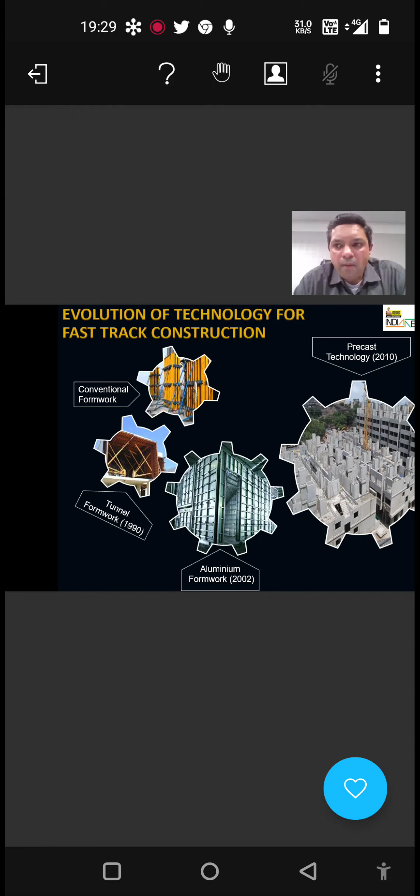With that poll now, next what we are... precast, right? We started precast, and again I keep repeating that I am not in precast business. L&T is not in precast business. This precast has evolved over our need.

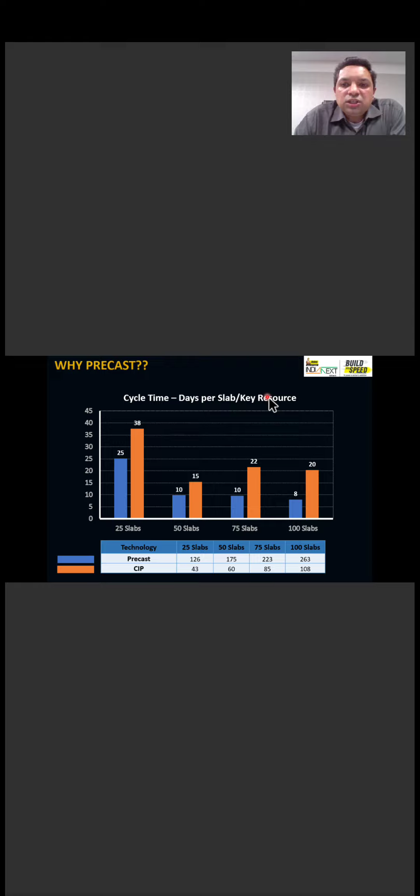So in aluminum system, it's the aluminum formwork set. In precast system, it's the crane. That's my key resource, key bottleneck at the site. So how many cranes I have put, and per crane, what am I getting out of that? If you look at that in terms of resources put and then the cycle time, days per slab, you will quickly start seeing that even if this is quicker, this was done with many more sets. There were almost 20 plus sets put in.

So per set, I still took 25 days to build one floor in precast, and in cast in place, it took 38 days to build one floor. So it's obvious that the precast is doing better in terms of your resources. If I need even more speed, because this is designed to what is planned, what the client wants, I can just put another crane and get more speed out of it. Putting another formwork set has its own issues, right?

The second thing is, if you look at how we improve things, right? The two projects were not going at the same time.

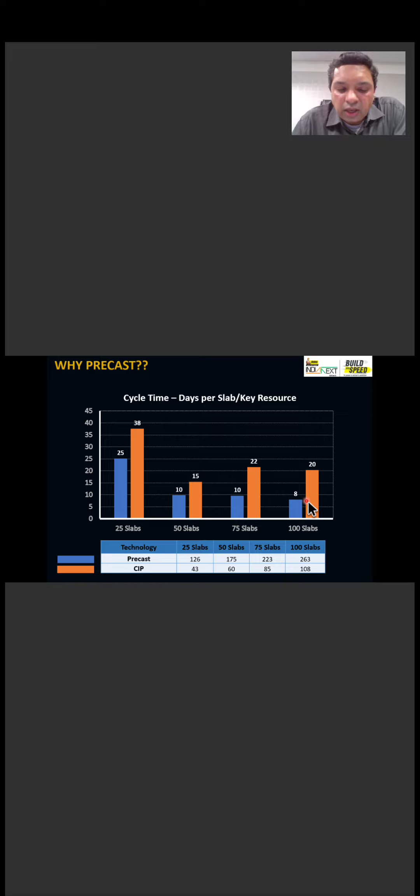There is some delay because of COVID, but it takes a little more time while your project warms up, and then you improve your speed. So this increased again for the COVID second wave, and then it kind of maintained. If you see precast, this has quickly built up, and once it built up, it has sustained that cycle time, right? That's what I wanted to drive through this.

The other thing, if I do the same project again, whatever we estimate usually, if you look at aluminum formwork, we want fewer people at site, right? We want fewer resources so that my risk is lower. One of the biggest risks in construction today, especially residential, is having your workforce at site. When COVID waves hit, the biggest thing was getting people back, right? Everybody, even media, was talking about it. So if I have fewer people to do the same work, my risks are less, right?

The challenges are less. If you look at that entire activity in aluminum formwork, per cubic meter of concrete, I need about 5.5 man days. So let's assume I need 5 people there. For the same thing in precast, which is conventional precast and automatic precast, this is what we are doing now. We can even go to fully automatic, what the global industry usually does, and it will improve even further. But I have kept it for where India is right now, what we are doing at best. I am looking at 2.5 man days, so it's about half.

But that's not the real story. Out of these 2.5 man days, I need about 1 for production and only 1.5 at site. So if you compare site activities in precast and conventional construction, I have about 70% reduction of site activities or site requirement of people. And this is where I'm covering my risk. I don't have to worry as much about having the workforce at site.

Workforce at factory is a very different ball game, right? We have a much higher retention ratio at factory because they're working in a much more controlled environment, at ground level, in a covered shed. I don't have that worry of not having people, right? Whoever is there, they always stay.

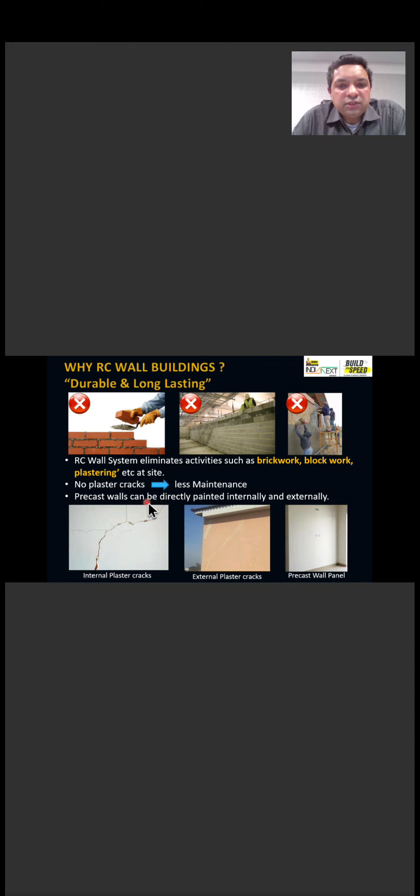That call was taken in the 2002 timeframe, right, when aluminum formwork became popular, for this very reason, especially in high-rise construction. I don't want to go outside, put that scaffolding and finish the building. I will pour concrete, even if it costs slightly more. The net tangible benefits are much higher compared to the upfront cost. And this is one example.

This is our building. This is a precast building, but the lower floor was done in cast in place because it's a non-typical floor. And this was done in brick wall and plaster, and then the building above is in precast RC concrete. This picture was taken about 6 months ago, after the building has been standing for 7 years.

Pragati Towers in Mumbai, a ground plus 23-story tall building, about 70 meters tall. Everything after the first floor, what you see in the picture, is done in precast system, factory made, including your spandrels, the walls, the lift shafts, the precast stairs, the whole 9 yards. This was one of our flagship projects.

That picture you saw had 3 buildings; we later added 3 more. So about 2,000 flats were built in about a 3-year time frame. It of course won several awards.

Yeah, thank you. Several awards, and the building has been...

The second project, which is what I'm going to discuss a little more in terms of the case studies, is our Provident Sunworth project in Bangalore that we started in 2014. Again, mass housing. This was for a private builder. It's not a government project. About 66 towers, 5,000 plus units, all G plus 12 or G plus 14 towers. Total precast system. What you see in the picture is all precast.

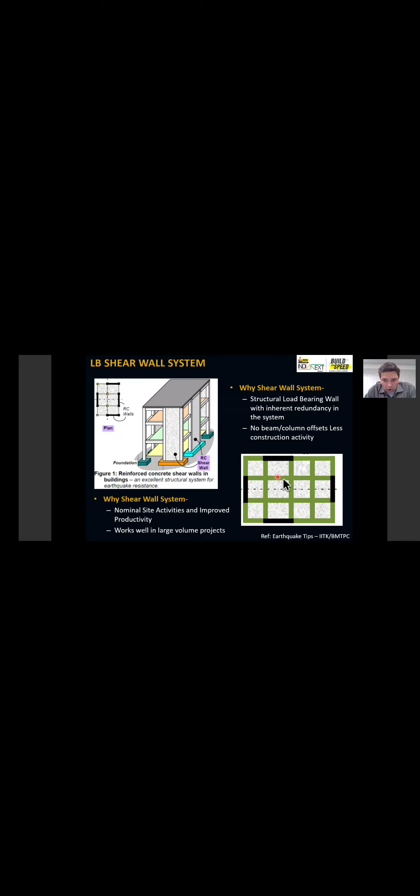What we are doing is we are trying to see if we can do all walls. Some of those walls are still my shear walls, the balance are my gravity walls. It is equivalent to your beam column system, right? Not all walls are shear walls in the system. Now, once we pass this, what are we doing in precast? The precast philosophy is the next step of your aluminum formwork system, nothing else. Exact same system, same building. Only thing is I split the panels and make it in the factory.

How do we connect it? We are using this emulative approach, right? We can't get into too many details, but just focus on the word emulative. What that means is if you use this emulative detailing, your precast building is going to behave equivalent to your conventional building, that is aluminum formwork. This is from the American Concrete Institute. They have specific standards for emulative detailing. They will tell you exactly what to do. If you do that kind of detailing, the wet construction connections, you get equivalent performance.

There is a Precast/Prestressed Concrete Institute, again in the US. They take it even a further step. They said that if you do this emulative detailing, regardless of seismic region, you will get performance equivalent to that cast in place system. And this is what we are doing. What is not emulative? Welded connections, bolted connections. We are probably a couple of years away in India from adopting those. There are various reasons.

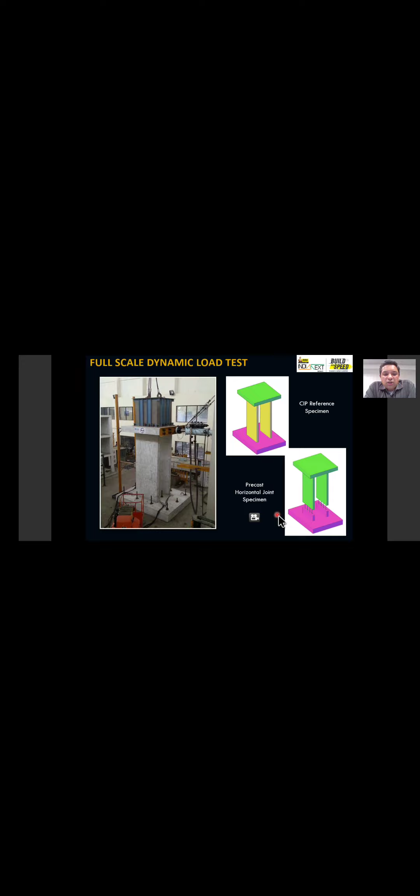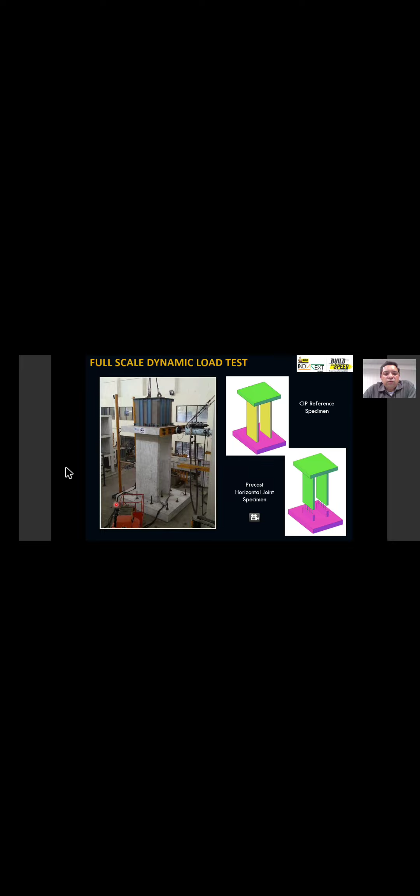But if you want to see that emulative performance, we were also getting that question a lot. So what we did is we ran a full-scale test program in the 2016 timeframe, saying this is how I'm going to do emulative detailing, and I'm going to validate if it gives me equivalent performance. Right? That word equivalent is important. I don't want better performance. I don't want superior performance, because all our design codes are currently built around the RCC system. So I just want to make sure that I build one specimen in the conventional system.

These are my two shear walls, foundation if you want to imagine, and a slab on top of it. This is a full 3-meter high wall, right? And we are validating the seismic performance. This was done in the SERC Chennai lab. This was one of the very few labs at that time which had this seismic actuator, which pushes the building and pulls it in a controlled manner, so we can study it in detail and see how the system is performing. So this cast in place specimen was prepared, and then the precast specimen was prepared using the joints, right?

Again, the idea is, like I said, we want to see if they're performing similar. We don't really care at what level. So these precast joints were emulated. And then you look at your force versus displacement curves, right? In engineering terms, that's how my toughness is going to be calculated. The area under the curve is going to be your E values, or your R values, equivalent performance, or the ductility, as we call it, that we're looking for.

So again, the precast and conventional have to behave similarly, then we get equivalent performance. And usually I get people saying, okay, see, your equivalent performance is not there, the cast in place wall is so much higher.

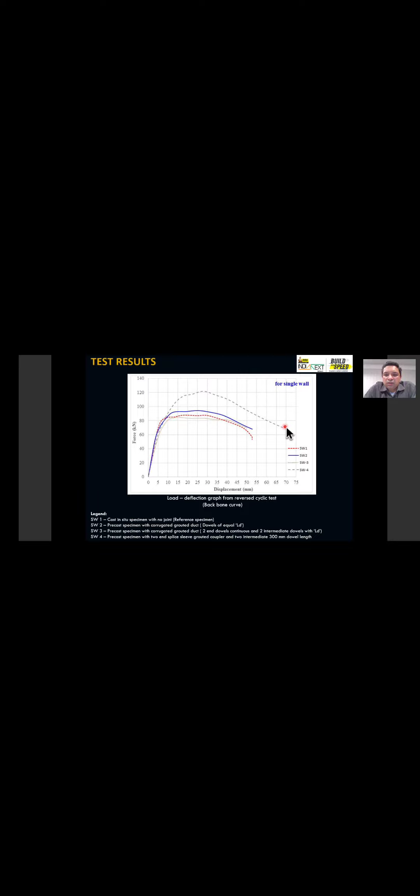But if you really look at that, SW1 is my cast in place wall. This is that CIP reference specimen, and these two are my precast specimens, and these are behaving similar. This is what we want. If you calculate the area under that curve, you are going to get similar performance. This is actually one of the precast connections that works better than your lap connection. That's how you see the higher values. All these walls were designed for the same design capacity, right?

So this is the grouted couplers what we are using now, after 6-7 years of following up and making it available in India. But these are confined couplers, high strength grout. They use M100 grout, and that's how you get slightly better performance out of that, right? Now, at that time, we didn't have any testing in India, so we went to Hong Kong and got this tested for the cyclic performance. That's where that seismic detailing is important.

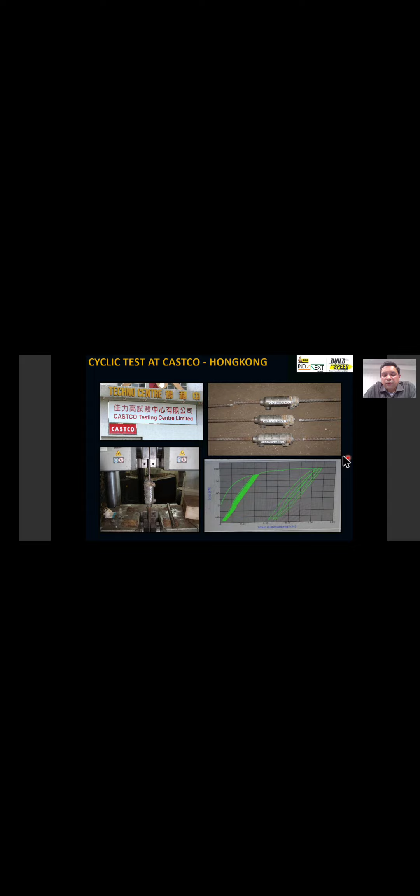So if you want to look at it in one summary, this is reverse cyclic test. So if this is your 0, it is pulling and then pushing, 95% of tension to 50% compression. So you get that cyclic behavior. They have 20 cycles, then they pull it to twice the yield and do 4 cycles. They pull it to 5 times yield and do 4 cycles, and then they pull it to failure. And the test says that your failure has to be in steel. That's where you get the ductility, and not in the brittle portion where the grouted connection is.

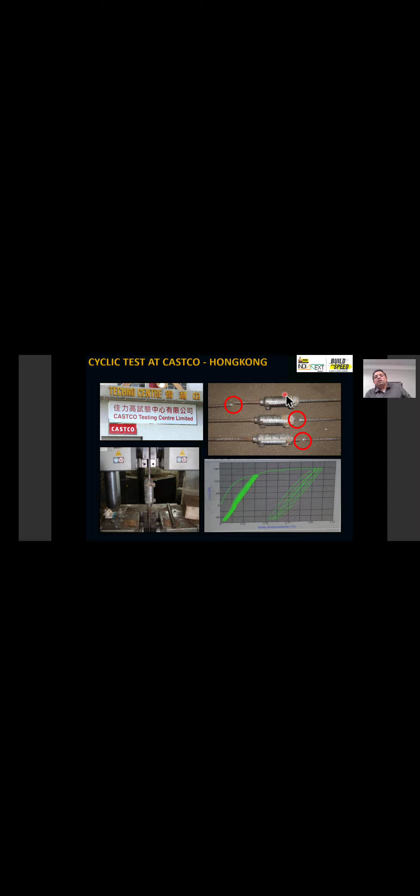So this is one of the key validations of how you get ductility in your precast systems. All these connections, if you see, beautiful yielded curves, this is where your steel is yielding. It's giving you that indication, whatever you learn in your schools, right? That you have got the failure warning. It cannot be a sudden failure. So these yields give you enough warning, and then it fails. The grout does not fail, so your system is ductile.

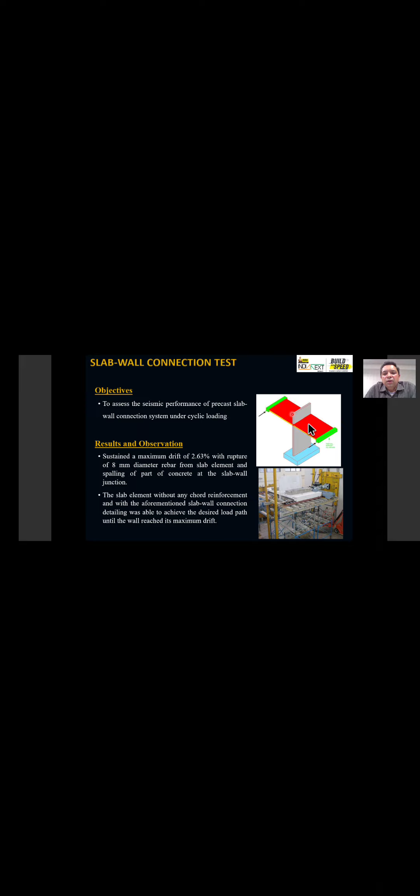Same way we have done other systems, where we checked the slab and wall full scale testing again, where we looked at the load path, whether your diaphragm action is working or not. Then we looked at the vertical connections and saw how the performance is going. So that entire connections portfolio is validated. Once that is done, with that emulative detailing, you are going to get similar performance because your concrete elements are much better. I am using at least M50 grade concrete because of my early demoulding strength. So that element is going to be much superior than the conventional system, and your joints are validated.

So on those lines, we now have several approvals, everything in place from all leading institutes. IIT Madras is usually our peer review agency for all precast projects. You go to IIT Bombay, we have that certification. And including the government agency BMTPC, which has certified it for government projects. So that's quickly the design philosophy and how we have evaluated the technology, how we have made sure that all the requirements are with us.

All these test programs were not really needed, right? This has been done outside. Of course, we did slightly different, the reverse cyclic way is not even done outside. But we wanted that validation. We wanted to make sure that tomorrow nothing will get questioned and that entire portfolio is ready. That gave the confidence to go and tender for a 5,000 crore project with the technology. You cannot go for that large a project on a whim. The management also would not allow that. So these are the requirements to go through.

Now, how the technology is built in construction, maybe 10 minutes, and then, Deepal, I think by 8:10 or so I should be wrapping it up.

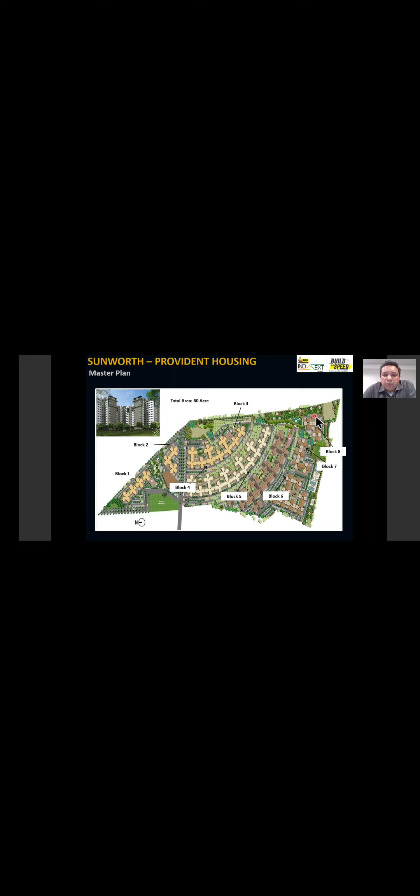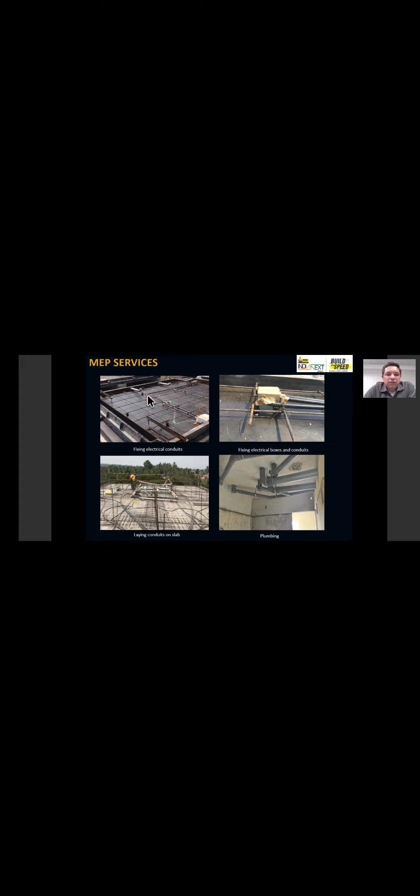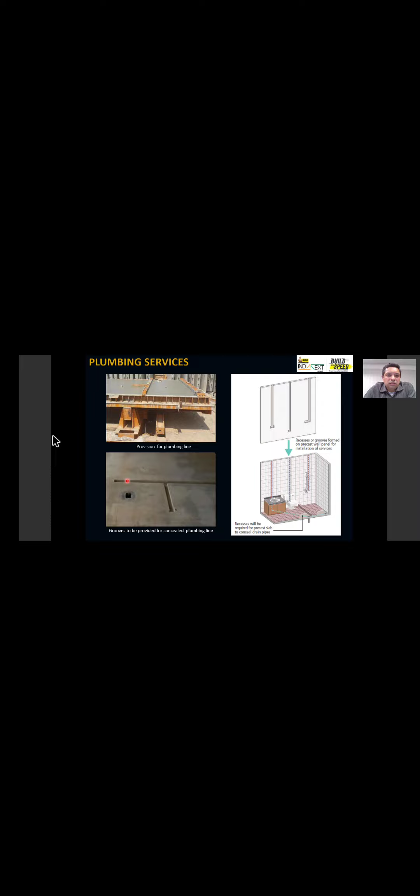Usually, electrical embeds are concealed. MEP pipes we do undersunk preferably. If not, we can do the conventional sunk also. But what we usually do for pipes is leave the chases so that there is some access, because conduits don't need that. Pipes, no matter what you do, have joints, they may leak, and you can't jackhammer M50 concrete, so we leave that and patch it back. So this is how the chases are made in the panel before they're shipped out.

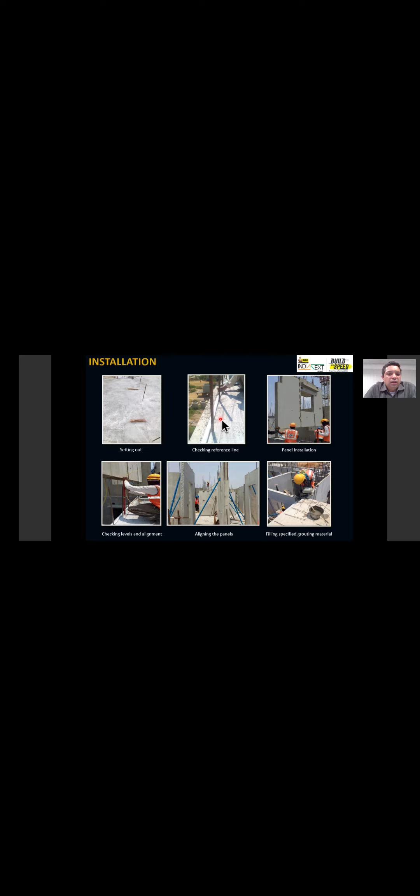Transportation: because my factory is right at the site, I don't have to worry a lot about it. We now have standardized norms, the A-frame, V-frame, trailer loads, and a very well established system to do the transportation. Again, it comes back to site. There are very set guidelines established. They know what to measure. They know how to do the leveling. We have the push-pull props to set the levels after it's erected. Once they do that, everything automatically is going to fit in its place.

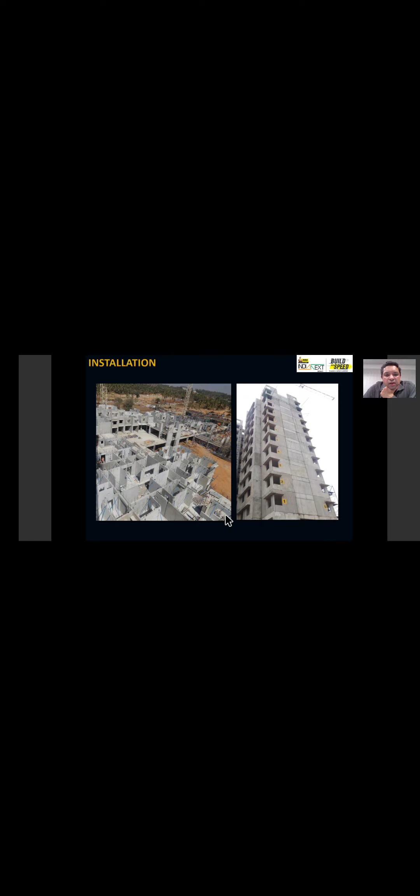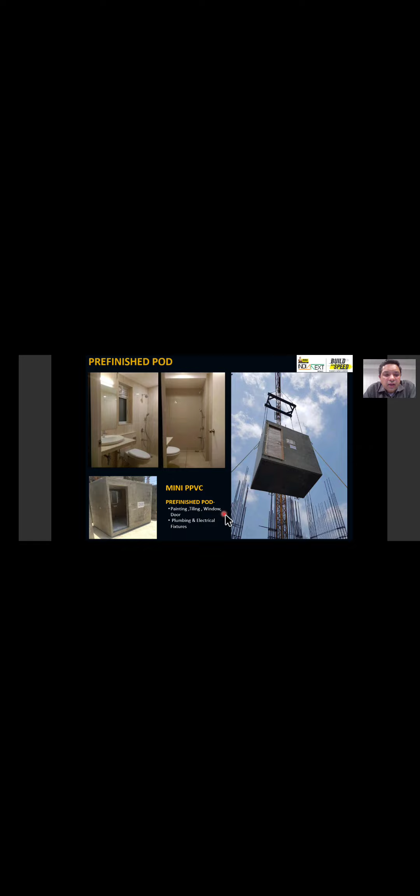Yeah, some of the same pictures again at the larger scale. This is how that project, I think the architect had conceived it in 2014, and this is how we finished it and handed it over in the 2017-18 time. So that's that. One other thing in residential that we are exploring now is that I don't have to do the entire building. Again, I am catering to my site's demands, what they want in terms of speed and finishing. So if you look at a typical residential unit and you ask your construction manager what their biggest issues are after the building is done.

If you see 15 years ago, we were doing a typical building in about 8-9 months, maybe 10 months, and then we were finishing in about 6 months. Now suddenly we have brought these new technologies, and instead of 10 months, 11 months, I am finishing that in 6 months, but finishing is still 6 months, right? So now finishing is under pressure.

So then if you ask him, he'll say that living room, bedrooms, I don't care, but my kitchens and my toilets take the most time because most activities are there. And then it's usually a very small space. So I cannot have 3 agencies working at the same time. It's one by one. So then we said what we will do is we will look at finishing those in the factory. So what you see in the picture is a 10-ton element, which is finished.

These photos are the finished photos of the inside of this unit. So everything was done in the factory: finishing, waterproofing, coordination, everything. And then the pod was just kept before the slab was to be poured. And then we did the construction. When everything was finished, they came back and they only replaced the door because it needed protection. So they replaced the door and everything inside is ready.

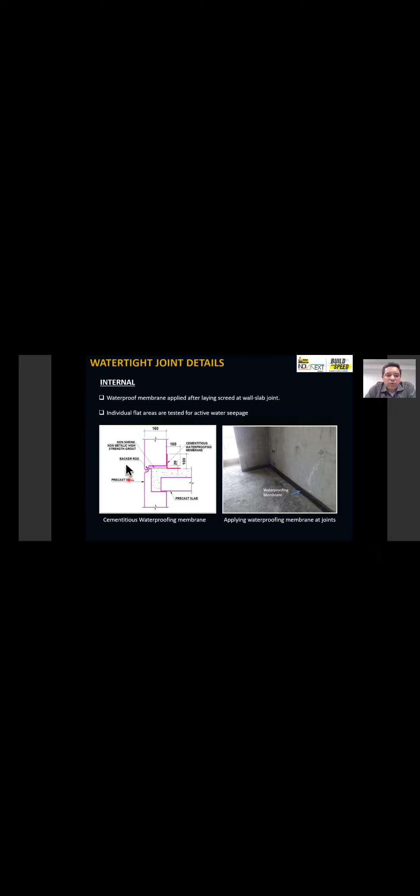This is where again, if you are looking at competition, maybe improving the technology, this is where everything lies: making sure your joint is covered and controlled. So there is a step, there is a non-shrink, non-metallic high strength grout. There is an additional waterproofing that we are doing everywhere, right? The philosophy is water should not go from one room to another as well.

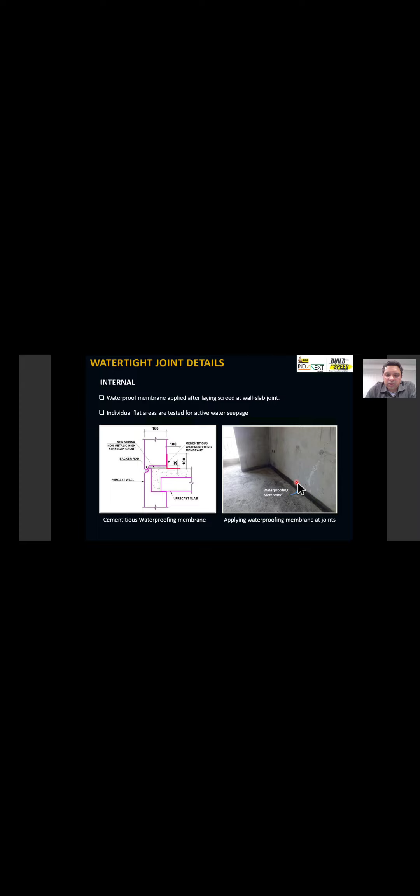Forget the flat. So all rooms we are treating that, making sure that it doesn't go. And after we treat it, we make sure that actually they behave like a water tank. We are literally building water tanks now. So we flood the flats and we actually pond water and make sure that after 4 hours it is taken out.

But how are the lower flats doing, right? How are we seeing the leakages and all? And do we not get any leakage? We do, because it is not a water tank, right? We're trying to build it, but it's a residential unit. So there are spots, some areas where we get the seepages.

But from 2012 to 2022 now, if I have to put my experience, a lot of times I call myself not a structural engineer, forget it, I'm a waterproofing engineer. But if I had a leakage problem in the 2012-14 time frame, today I have only a seepage problem, right? There is a big difference. Leakage is where you used to see drops.

Right now, whatever detailing we're doing, we see some seepage spots which dry also. We have to treat those, right? I don't have dripping water issues. There is no water. There is only moisture. That's where we stand today.

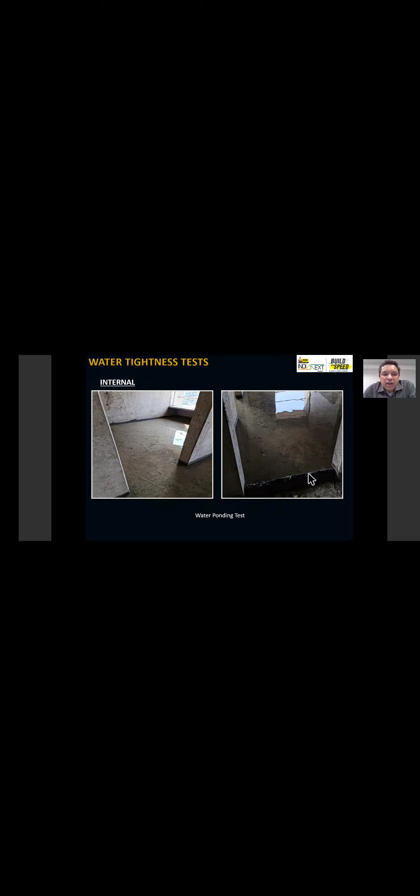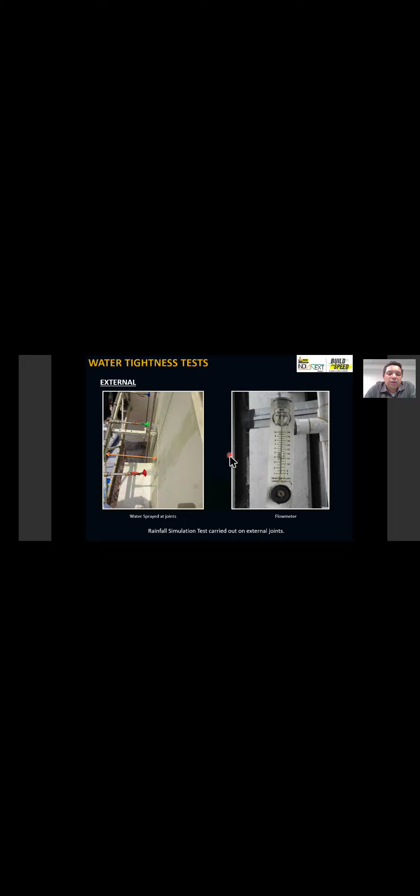Then for the external joints also, we are actually looking at an actual sprinkler test. If you see, there are codes now which are specifying what the water discharge rate should be, how we simulate the rain. We adopted this at that time using Singapore detailing, but now it is in IS codes also. So all that is looked at. And then we are scoring our own buildings. That's how the quality benchmark we are establishing for precast buildings.

If you are familiar with the Singapore system, there is CONQUAS. We call it precast building quality score. But the Provident building, we scored. We have our own set of data now of what score it has, right? It's not 100 everywhere. Some has 84, some has that score; all those details are there.

If you want to walk that Provident building, you're going to go there. I'm going to show you that this is the finished flat. This has the score of 84. When I build your building, I'm going to give you a score of 84 or more. Earlier, we did not have that kind of database. Now I have my benchmark set. You will get a building better than Provident. How we'll track it is in terms of the scoring, right? So that's how we are doing.

Now coming to the last part of the presentation quickly, our ongoing work, right? This CIDCO housing project, what we are doing differently. Like I said, we are right at the inception of it. So maybe next time we do a better focused presentation on just the CIDCO job. But looking at the value, this is one plot where we are doing about 7,500 units, about 1,500 crore total project, and about 66 buildings. We are doing about 25 currently.

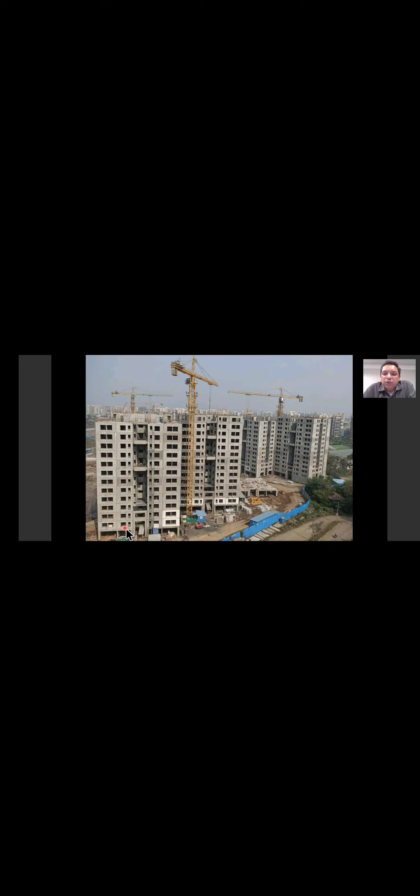So these are those finished buildings. They will get finishing, painting, everything. Maybe in a couple of months we'll have finished pictures also. But like I said, this building, if you avoid the COVID delays, has been made in about 6 months. This is our first building. This has been standing for about 6 months.

So now come to the last portion of the presentation. We are looking at that 1.2 lakh elements count, right? I told you maybe 180 elements shipped every day, erected every day. So if I have to track that project, my usual Excel day-to-day tracking is just not going to be enough. It has to have some kind of automation. So we said we are going to put digital solutions in place. Again, this is the need of the project. I'm not forcing the digital solution. I have to do it. I don't have any other way.

Anyway, the tender required BIM, so everything was done in BIM. That BIM was a central resource for all these agencies. This is the day-to-day coordination that is needed. I sit in the BU, I review that. The client is looking at that. The design team is looking at that. The factory wants it. Site wants it. Planning wants it. So we started with the BIM model, and all these drawings, everything is done in BIM.

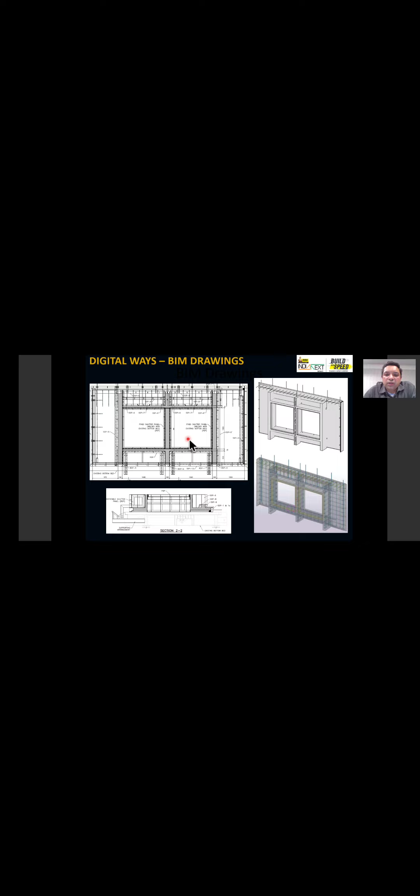Whatever you see in this picture is built in BIM, including each rebar, each tie, whatever detailing, whatever connection accessories, everything is in BIM. So once that model is done, this entire drawing is just at the click of a button, maybe another 15% of work for some dimensions, but the drawing is ready. Tomorrow I change this window size, that drawing is ready. That's the BIM advantage we are specifically taking for precast. All my 2D shop drawings are prepared directly from BIM.

Now, once I have that, we built our own in-house app which will track all these elements. That was my idea, that each element should have tracking. This is still work in progress. We are probably going full-fledged in usage by this year March. But what that app is doing is tracking each element through its life cycle.

So when it was cast, using what concrete, when it was demolded, what was the strength at that time, who checked it, when it was sitting in the yard, who looked at the pre-delivery inspection, when it was picked up, sent to site. If you click that barcode, or we have the QR scan, it can be scanned by any phone. At any stage, yard or site, if I scan it, it's going to give me the entire history of that panel. That's how we are tracking these elements in real time.

So imagine earlier it used to be where panels were erected maybe a day before. Then somebody comes next day morning, they put it in Excel saying these panels were erected. Then by maybe next day afternoon, he's circulating the report. And somebody is looking at that and saying, oh, this is not right. Then it flags it. By the time site knows about it, 2 days are gone.

Here, at 8 p.m. the panel is scanned, erected. I get that in the portal saying this panel shifts from this area to this area, the status is updated real time, live. So that entire snapshot of the project I'm going to see in real time. How many panels are to be produced, how many are produced, how many are sitting, how many are shipped, how many are finished, right?